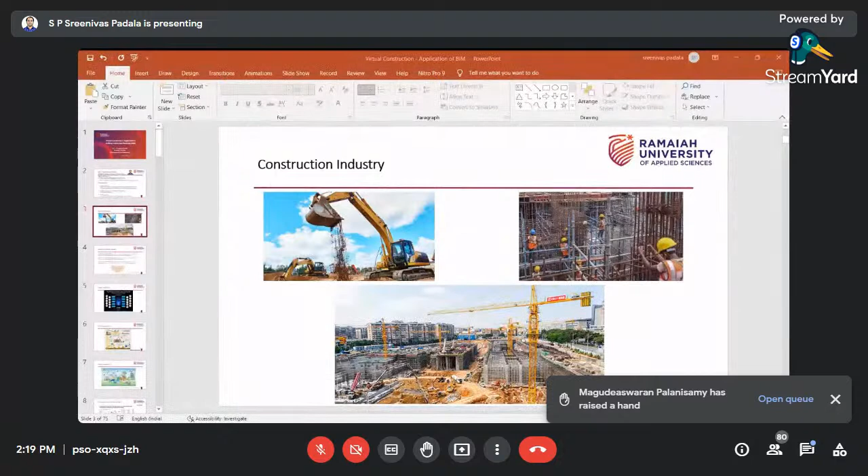Slides are not moving. Is it not moving now? Yes sir. From here it is moving. Can any other student check? Yes sir, it's not moving. Can you move it please? We'll check, just let me reshare, I think that will work, I'll share my entire screen.

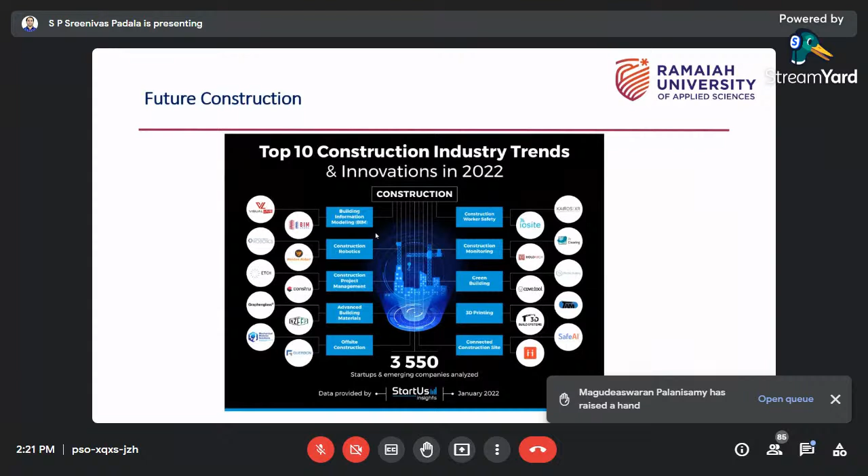I don't say this is only the future of civil, but apart from design, in construction planning part, what I'm trying to say is we have a lot of scope where you can sit in office and work. In layman language, it's more like office jobs basically, but with a lot of skills you can only get.

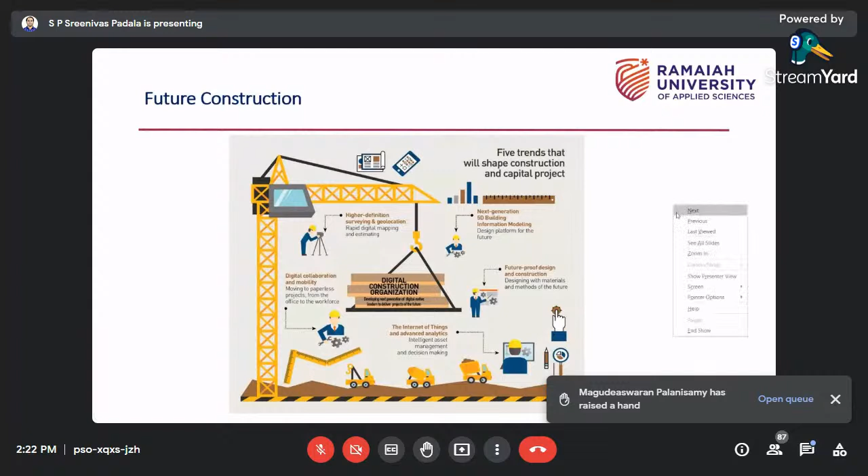They mentioned 5 trends that will shape construction and capital projects. So they have given 5 trends. You can see on the top left hand side, high definition surveying. Then we have next generation 5D building information modeling.

Then future proof design and construction. Then Internet of Things and advanced analytics. Then on the left hand side again, you can see digital collaboration and mobility. So these are some of the trends they have mentioned which will shape the industry.

Like it will change. So again, if you see in these, who is going to work? Not the labor or operators, equipment operators, or supervisors - they all will be working at the site. But these are the technologies which you will be using, right? So it's a different skill.

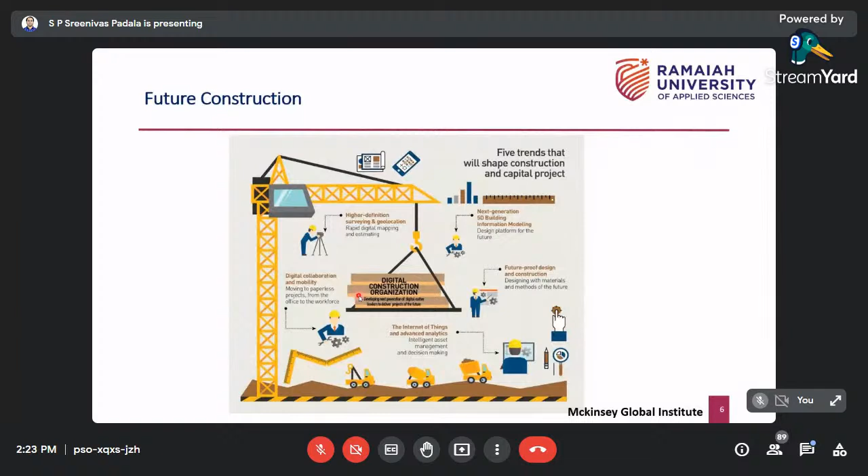So it all comes under digital construction organization. What it says is the future organization will become a digital organization. Like we know, everyone talks about digitalization now, starting with Paytm, right? For 3 years we're hearing about digital everywhere. The same thing is applicable even in our case. So the future will not be the normal construction industry, but a digital construction industry.

So this is another article by World Economic Forum, Boston Consulting Group. It is also one of the leading consultants, in abroad as well as in India. So they also gave the top 10 trends which will change the industry.

So again, starting here, prefabrication is there. Now you know Sobha developers, Sobha company, where my students are placed recently. So the entire Bangalore now, they are making prefabrication. Whatever projects they are executing in Bangalore, everything will become precast.

Then we have advanced building materials, which again repeats 3D printing. The previous session speaker already gave an introduction on advanced building materials and 3D printing. Then autonomous construction is more into robotics, augmented reality, and virtualization.

So I'm talking about this topic. Today's topic is point number 5: big data and predictive analytics, wireless monitoring, cloud real-time collaboration, 3D scanning, 3D printing - I will discuss these in the presentation - and 10, building information modeling.

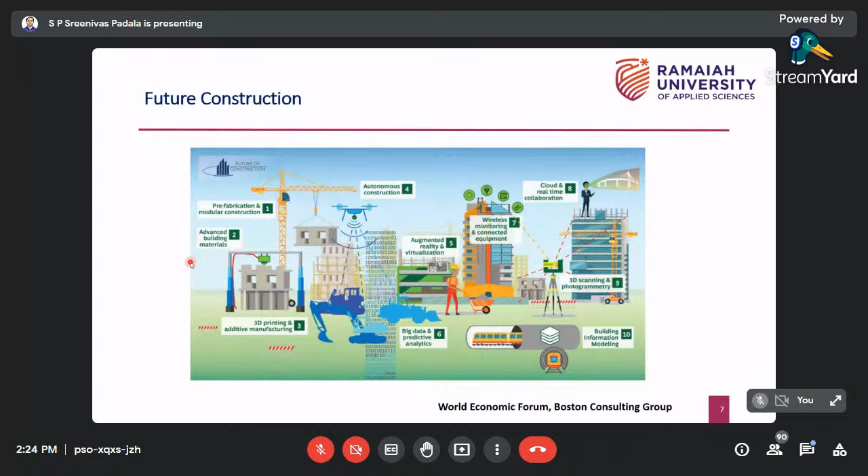So point 5, 9 and 10 I will be highlighting in this presentation. You can see how these trends will shape the industry, and you have a lot of scope. You have a lot of scope when you enter into our industry, maybe not immediately, but in the future. There are many articles that talk about technology.

Now I will start the actual topic. It's virtual construction. If you see here, the person is holding a mobile, and you can see there is a 3D plan on the mobile screen. What is the meaning of this? In layman's language, I think you can actually build the entire model on your mobile only - not now, but maybe 10 years later.

So virtual construction is all about building everything virtually first. You don't start the project immediately - it takes around 6 months. You start building up everything virtually, then you go to the project, call all the laborers, start procuring all the materials and equipment, and then start the project. But spend some time initially on building up everything virtually.

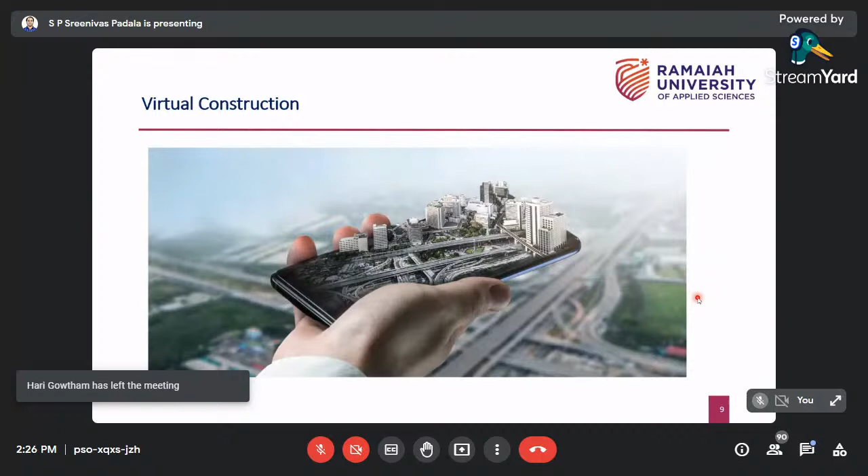Why? Because I will explain that later. So virtual construction is all about building up virtually - it's about the interconnection of various digital technologies, like site sensors. We'll be using a lot of sensors, self-operating equipment with no operator, and even deliveries of materials will be done automatically. Even concrete pouring is done without an operator - there's more automation in this.

Then, skilled labor - you can see on the left hand side how the labor is currently. For using this technology, the labor will be holding a tab in hand and doing a lot of analysis. You'll be more aware of the technologies, and ultimately the labor will become skilled. Skilled is not only about how quickly you can do the same work daily - that is not skilled. Skilled labor is about capturing and adopting the latest trends and technologies and applying them into the project.

Then you can see it's called robot. Robot is a small term here - not a human robot, but something where some activities can be done automatically, like bricklaying robots and painting robots. To do all these things, you need to build up virtually - you can simulate all these things. That's virtual construction.

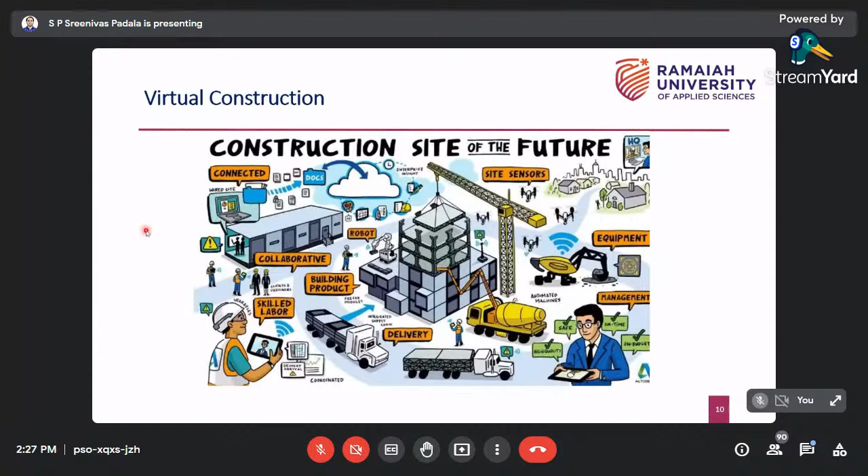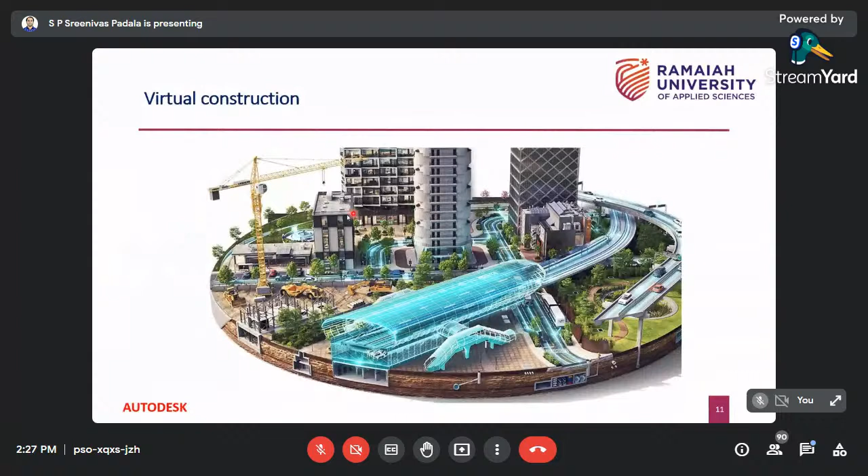Now you can see in this picture, another article by Autodesk. So what exactly you see here is an apartment - some commercial or mixed apartment, or maybe a residential project. You can see it's gray color - all existing in the project, existing on the land. Now I want to build a highway over this - I want to construct a flyover or a metro station, anything.

So what I will do is I will not start the project directly. I will not directly go to the site and start the project and face many problems, then stop the work. I will not do that, because if you see, it's a commercial area with a lot of people walking here and there, traveling and all.

So you cannot start the project just like that. You need to take permission. You need to see the challenges. You need to try to do the feasibility study, many things.

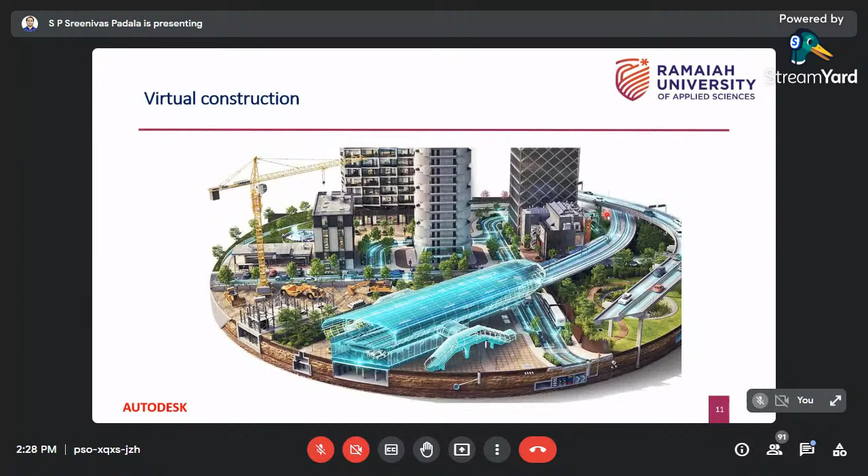So virtual construction helps us build digitally before you start the project. So what you're seeing here is all a virtual model. It's not a real model. You are placing a virtual model into the existing location digitally, and you're trying to do some feasibility study, trying to check whether it is feasible or not. So here, you can change the shape of the structure, you can change the alignment, you can do many things virtually.

Then you move to the site and give all the work to the contractor, and labor will take care of that automatically. We don't require that. So our job is mainly this: developing a model like this, doing simulations, estimating the time, estimating the cost, checking all the feasibilities, checking the alignments virtually. Again, everything should be done virtually.

So like I said, virtual construction is one of the major fields. When I say virtual construction, we have many things there. We have software systems like BIM, we have artificial intelligence, and we have autonomous construction equipment. These three basically together help us build everything virtually. But in this presentation, I'm talking only about BIM. I'm not talking about AI, and I'm not even talking about autonomous construction equipment in this presentation.

But overall, why is this happening? Why are all these changes required? Because we have a lot of manual work happening, and we have a lot of labor, but still labor is not available now. Earlier, 3-4 years back, if you talked about these technologies, people used to think about losing jobs. Now, if you see the trend after Corona, there is no labor available. No labor is interested in doing this work. They want to go and join industries, or even in malls, in shops, where they're getting at least 15 to 20,000. So why would they come and work in hot climate?

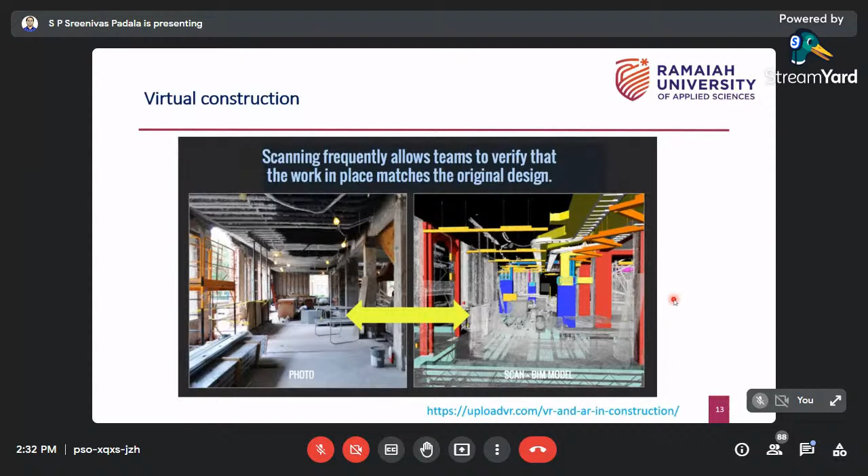So you build a 3D model in some software. Then you convert or transfer it into a tab like this. Then you come to the site and you can visualize. So you can imagine, by positioning this tab in front of you, you can see how this room will look like in the future.

So what you can see here is all these colors. The door is here, we have HVAC, some cable tray is here. On the right hand side, there is maybe a column or it can be a duct. And this white color is nothing but a duct, AC ducts, which are not there in this real model, right? It is not there.

So what you're trying to do is, you're not starting a project now, you're just planning it. You come to the site and you impose this picture onto the real model, and you're trying to see whether it is feasible. If it is feasible, okay, I will start the project. Otherwise I will not start, I will go back and I will rechange, I will modify. So I can do this several times without putting labor on the site, without wasting any money.

It will not cost much also for us. Initially it may cost much, I mean you have to invest much money to buy these softwares etc. But later, once you spend that, once you implement that, it will become very cheap in the later stages.

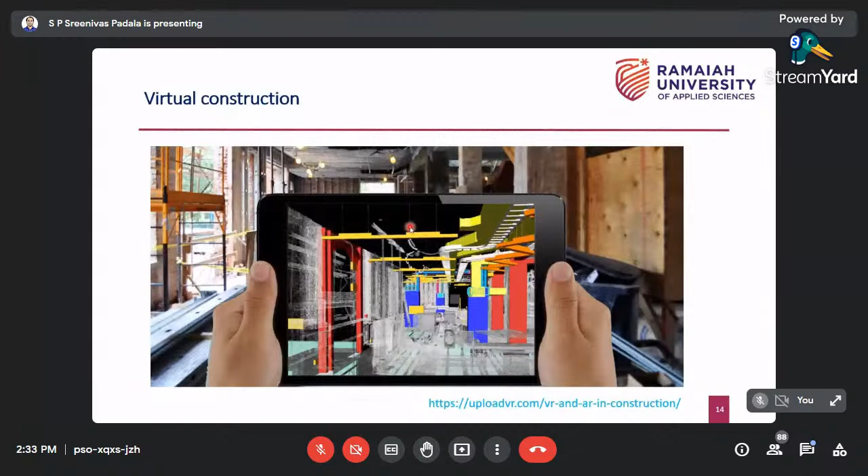That's what. Here also you can see that a person is checking the model, and there is no model actually in front of him. It's a steel structure which will come in the future.

So it's a company called Unity Reflect. They actually work on a set of solutions. It's available everywhere, in India also. The company is there in India also.

So what is happening? He built a 3D model virtually in his software called Autodesk Revit or many other softwares. Then he is coming to the site and checking how it will look like, if it is feasible or not. So I'll just play another video.

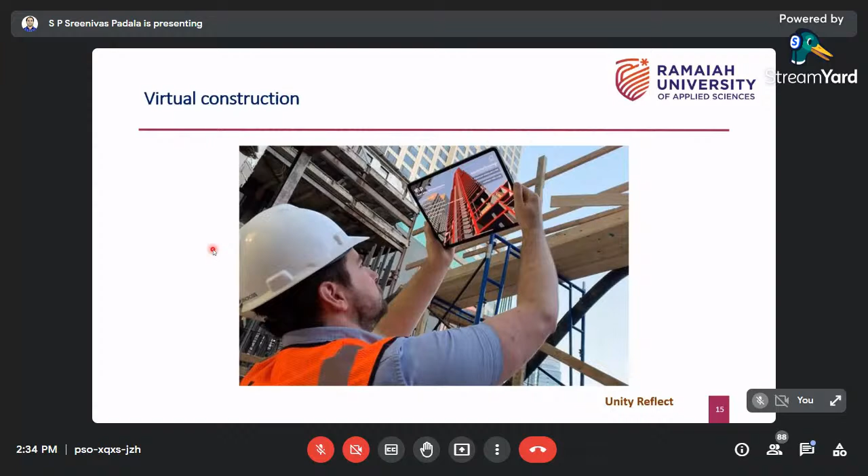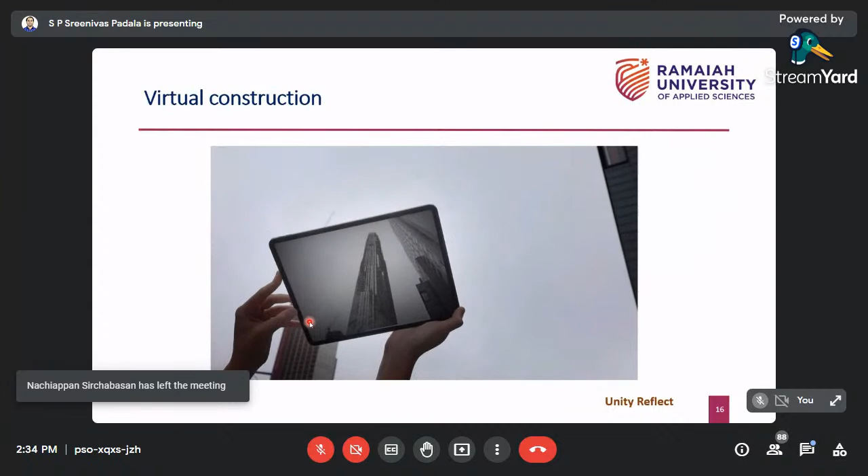So you can see this video now. In this video, you can see that on the person who is holding a tab, behind him there is no structure there. So what he is doing is he just wants to check how it will look like. So it's almost looking like real, right? The video, it's looking like real. There is no structure actually in front, but it shows the future, like how it will look in the future.

Basically, it's already happening, construction is happening, you can see here, but it's a finishing structure. So it's a very normal thing. It's mainly from an architectural point of view, they want to check the aesthetics on it, but it is not just about that. Many things can be done, which I will show in the next slides.

So it's another virtual model again. It is shared by James Bowles, one of my dearest friends. He's basically a 4D BIM consultant in UK. So he shared his video.

So what you're seeing here is, again, I think in your 4th year you should have a course called Construction Management and Entrepreneurship. There we'll be teaching CPM and PERT, critical path method. There is one technique called PERT where it helps us to schedule the project.

So when you talk about any project, we have so many activities, starting with excavation, then foundation construction, footing construction, then basement walls, retaining wall construction, then ground floor slab construction, then column construction, then slab construction, then door installation, lift installation. Like that we will have more than 200 to 300 activities basically.

So that is on the left hand side, what you see is this is what we're teaching currently. On the left hand side there is a bar, it's called a bar chart, or it is also called a schedule. On the right hand side you see the virtual model. So what is happening, you can also simulate that, you can simulate the entire project work. So I will show how it is done basically.

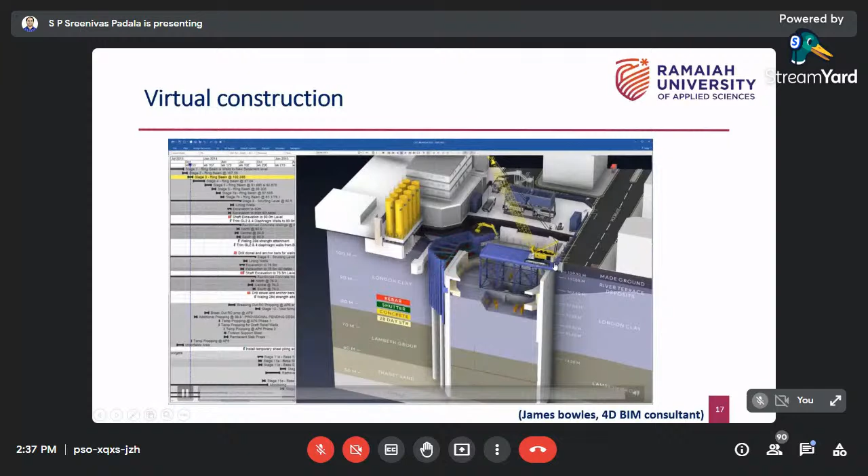As you can see, this is basically a simulation, showing how it is building up. So what you're seeing is the entire project construction, the execution of the project for the lift shaft. They're coming step by step down, it's a top-down construction, basically underground.

They're trying to build a shaft using a tower crane, a mobile crane, and an excavator. They are building up slab by slab, step by step. You can see how detailed it is. This is called 4D modeling.

It comes under BIM, so I've written 4D BIM at the bottom. It's one of the dimensions, I'll explain that later. What you're seeing in this video is, on the left hand side, the activity that is there, and for that activity it is showing the virtual construction, the visualization done for that.

So what is happening by doing this? What is the benefit? You can actually see how it goes. If any problem is there, sometimes you can check the time, how much time it is taking. You can return here, it shows 28 days, so it is taking 28 days. Then you have to check back whether it is feasible or not. If you don't want 28 days, you can minimize it to 20 days, or increase the time. You can do all these scenarios before you actually start the project.

So I'll just play again, just in case anyone missed out, it's only a few seconds. You can see that what I'm trying to show is this is all about virtual construction. See the level of detail we can do.

So we have software for this. There are softwares which are free for students, for faculty, for education, and there are softwares which are commercially available. The software which I'm showing is Synchro, by Bentley.

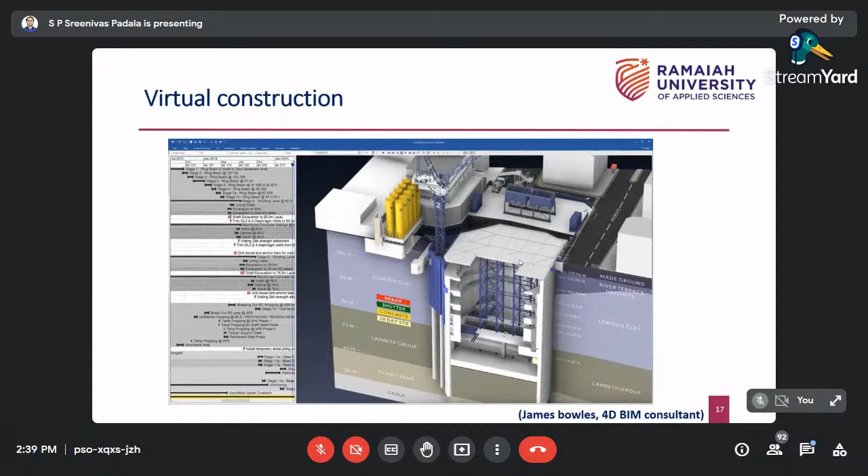So again, there are different terminologies in the world. People call virtual construction as digital twins. Digital twins means we have one real model, one original, and one virtual model - that's a digital twin. Then some people call it augmented reality.

Whatever videos or snapshots, like the one I showed where he went to the actual location with a tab and is checking the video, checking the model - that is called augmented reality. Some people also call it virtual reality. Again, currently they also call it BIM, which is a term used for virtual construction or virtual design. Recently I also came across zero drawings construction.

It's a very interesting term which I will show you later. Zero drawings construction means we don't use any 2D drawings, no AutoCAD drawings, no physical paper in hand - everything is 3D models. You hold a tab with you, go to the site, zoom the 3D models, change the location, visualize any angle, and communicate with the labor to start the working.

So there is a project in Norway where they are currently executing one overhead highway project without any drawings. It is called zero drawings construction. So there are different terminologies.

In India, most people are now also calling it digital construction. Then we have construction industry 4.0 - we already have industry 4.0, which is all about automation, and then connectivity using Wi-Fi technologies, all the IoTs. So these are the various terms. There are still many other terms, but I've used the ones which are most frequently used. But they all come under one platform: virtual construction, building up everything virtually before you start the project. That's all about that.

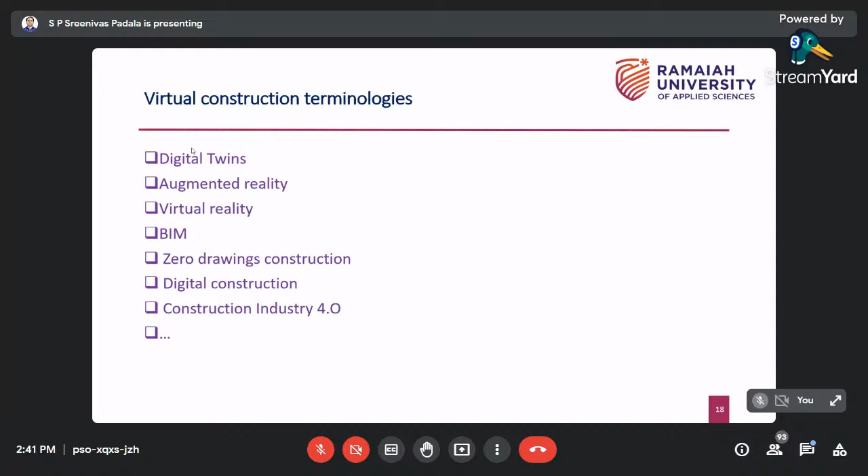So if I define what is VC in short form, it's virtual construction, or it is also called VDC, virtual design and construction. According to the BCA, Building Construction Authority Singapore, VC is management of BIM models as well as people and processes in order to achieve explicit project or organizational goals and to improve performance. So in essence, VDC is to build twice, first virtual, then real. That's what I'm trying to say from the beginning.

You see on the left-hand side, it's a virtual model. First you build the virtual model, you do all the simulations, not only design. What you're seeing here may look like architectural design, but it's not only that. You can do architectural design, then structural analysis, then time estimation, cost estimation, life cycle cost estimation. You can change materials and calculate carbon dioxide emissions. You can virtually do many types of analysis.

Then you start building the real one. So VDC, in short, is built twice. First virtual, then real. Build twice enables a project team to fully simulate design and construction in a virtual environment, prior to actual execution on the site.

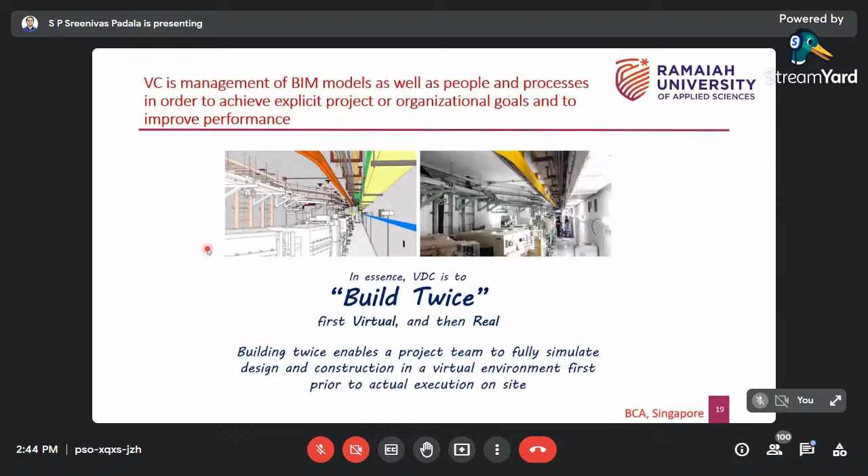So prior to the actual project starting, you build everything virtually, simulate, and check the data, how it works. You will find a lot of issues, not one or two, but too many issues, which can be minimized virtually without spending a lot of money. Once all the problems are resolved, then you can go to the site and actually start the project. You may get some other issues like rains or COVID, but those external causes cannot be managed with virtual construction, though internal issues can be.

So this is all about basically VC. And I was telling that I'm talking about awareness in India again.

So you see these articles, some news articles are there, just a sample I kept. All these articles are Indian, written by Indian companies, for India basically, not for other countries. The articles came from The Hindu, Times of India, India Today, and some technical articles like Geospatial World. They are all from Indian sources.

See that terminology, digital twins in demand. That means there is a skill requirement. What we're trying to say is students have to be aware of this type of technology and try to acquire it during their education.

Then power of augmented reality in construction. Then improved design and construction of the New Delhi International Convention Center through BIM. I think recently you know this center - the entire project was executed using BIM. It's basically Tata Projects and Shapoorji Pallonji who have executed the entire project using BIM.

So who actually did this entire work in Tata Projects company, and Shapoorji Pallonji Limited company? The engineers working in the company have done all those things themselves. These companies never hired any foreign consultants - it's all done by our Indian engineers only, who were capable, who learned and acquired these BIM skills.

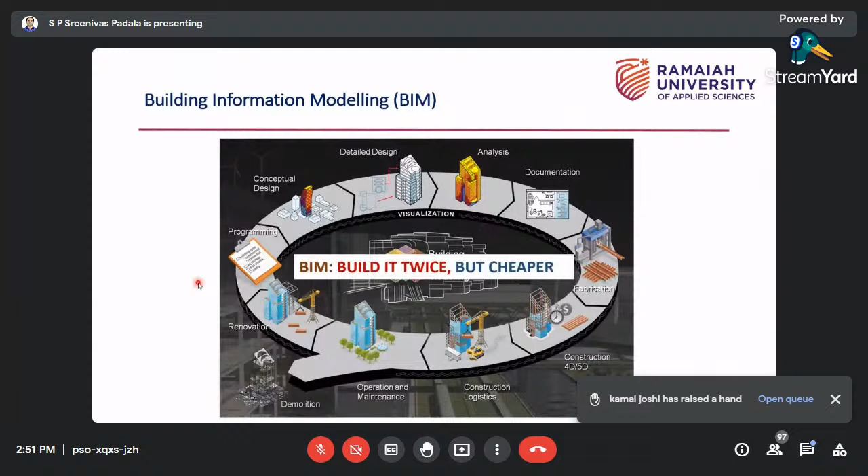So that's what they say - previously I told you virtual construction is all about building twice. Now BIM says that you build it twice, but cheaper. That's the output you get from BIM, building information modeling, or from virtual construction.

A question will arise: why build twice? Why spend this much money on all these things? Why develop software, why buy software, why buy systems? Why waste a lot of money on all this? The ultimate benefit of this technology called BIM or virtual construction is that finally we can build cheaper - we try to save money by doing this. We analyze which areas we can minimize cost in, which we cannot do in a real project - when we start the project directly, we don't get time to do all this. So BIM is all about that: you build it twice, but build it cheaper. Finally you can minimize time, reduce the project time, and reduce the cost of the project. That's the ultimate goal of virtual construction.

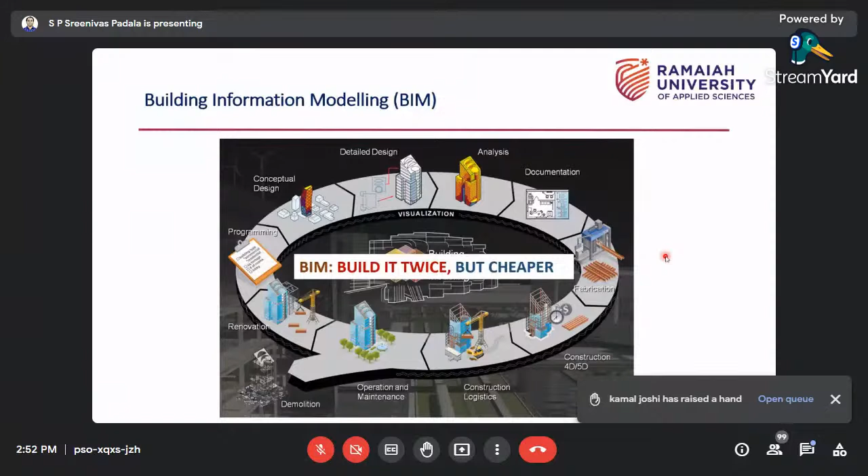Then only will people invest, right? If you just say you want to start this technology, who will listen? No one will listen unless you show the benefits.

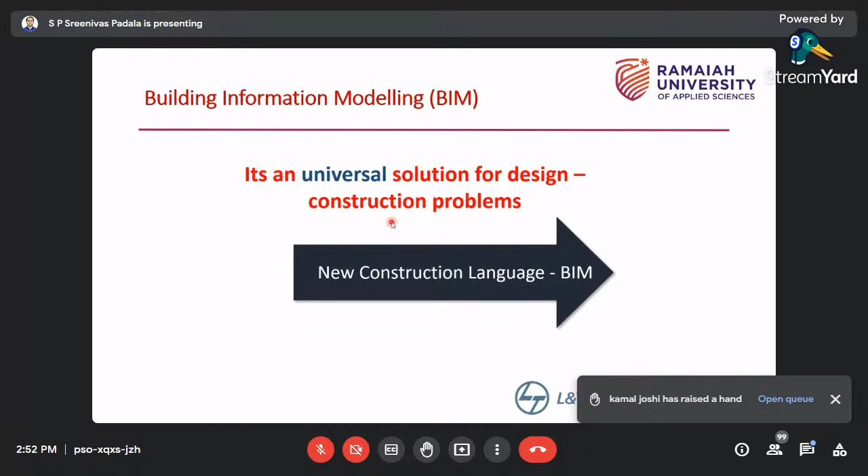So L&T construction says that BIM is a new construction language. There's a lot of demand for it in L&T also - we have people in HQ, and if you go to the head office in Tamil Nadu, there's a separate department currently working in this area. They call it a new construction language, BIM, because it is a universal solution for all design and construction problems - it can resolve all these issues. That's the reason.

So many things happen - like doors, once fixed, sometimes have to be refixed. They don't properly fix the elements. Sometimes you make a lot of mistakes in the design itself - the design can get wrong. Sometimes the project layout or site layout gets messed up, with so many equipment and all. So you end up doing a lot of rework in the project.

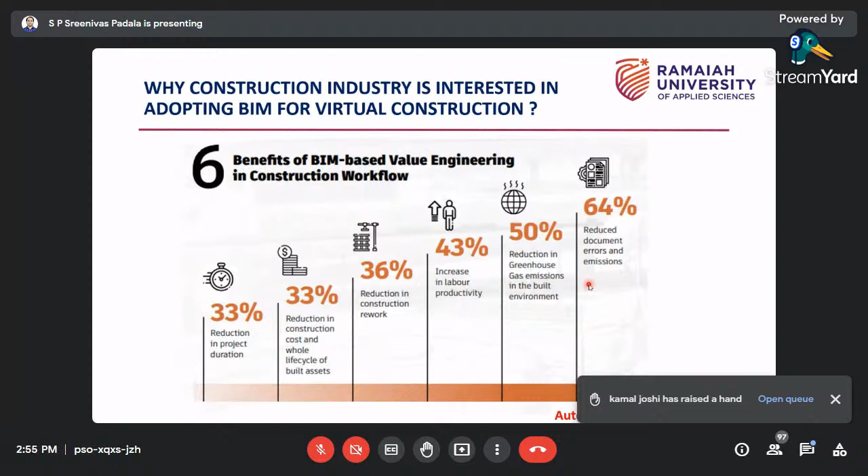So in BIM, what happens? We have several dimensions, like capital D. First is 3D, it is called visualization. It represents the building in 3D basically. Everyone knows 3D, even in AutoCAD we can have isometric views and all, right?

3D model can be done in AutoCAD, but that is different. In AutoCAD we develop line diagrams, line models, not true models. It's line diagrams basically. Whereas in Autodesk Revit, if you go into the Revit software, you can develop a true 3D model. BIM starts with 3D basically.

Then you have 4D, the fourth dimension, which is nothing but time. Then we have 5D, which is nothing but cost, the cost of the project. I think you might have already learned 5D in your estimation and costing course, where we teach how to take out quantities, do the rate analysis, then multiply quantity into rate, you get cost. That is 5D.

Then 6D is operation, all about facility management. After completing a project, you need to maintain the building, right? You will have a lot of things to maintain, check, and repair. You need to do servicing, and for commercial projects a lot of service in AC, air conditioning. You will have a lot of false ceiling, and under that false ceiling you will have plumbing, electrical, everything. All the lines go in the ceiling under the slab, so you have to do a lot of maintenance. That is nothing but 6D.

Then 7D is sustainability. We know the carbon dioxide emissions, right, and reusing waste materials in a project and all. So there also BIM can help. Then 8D is a quite new area. It comes under safety, immediate emergency plans, preventing security issues, more into building safety basically, which we're not working on. So these are the dimensions we currently have.

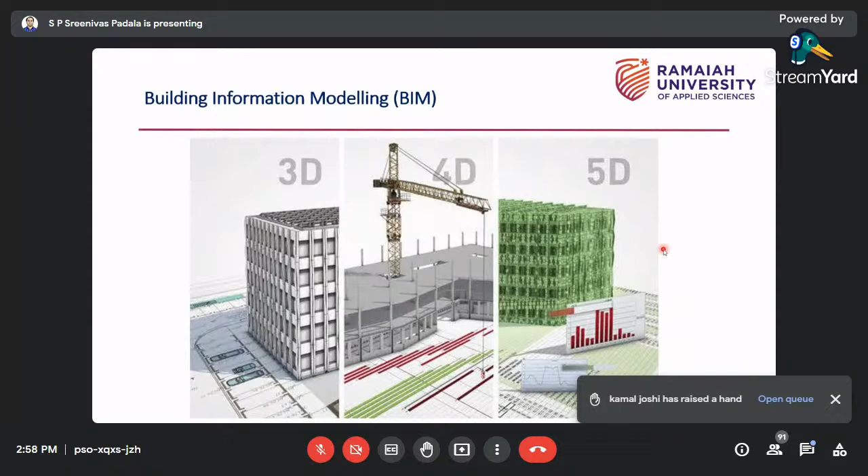So what is happening is all these dimensions are working on the 3D model again. The 3D model is a central platform for all the dimensions. Without a 3D model, you cannot do anything, you should have the 3D model first. From the 3D information model only, you can do time analysis, scheduling, costing, simulation, energy analysis, safety analysis, quality checks, everything can be done.

So you can visualize this model before you even start the project, and you can change it. Another advantage is you can change the location of a pipe to another location. You see what happens. You remove this column, put another column here, put one pipe here. You can do many changes virtually without going to the actual project, which cannot be done otherwise, and which will cost you huge amounts.

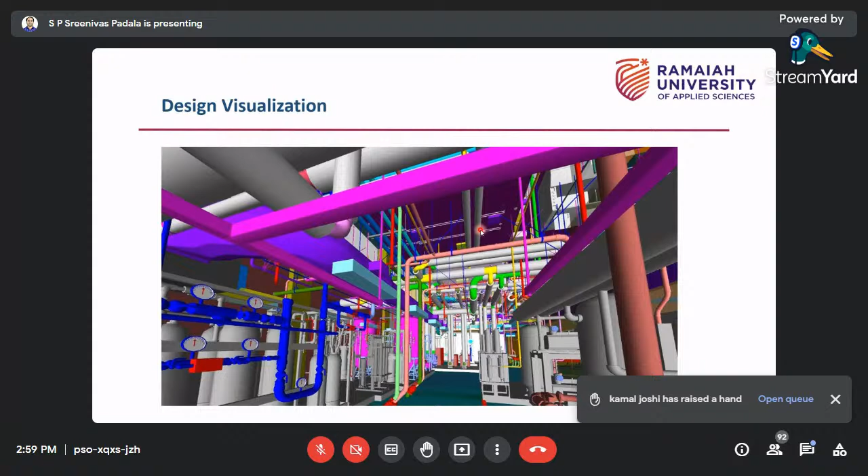Another main benefit of BIM is you can identify errors like clashes. You can see there are 2 elements crossing each other, which is not possible. Eventually you can identify these errors and go to the site to change it. But if you don't use this technology, you'll find this issue on site in the middle of the project.

Then you have to stop the work, tell them to redesign the building, and ask the designer to submit new drawings. At least 15 days will go into that. Whereas in this BIM platform, you can actually identify these errors. That's the main thing. Virtual construction is all about identifying all possible errors before you start the project so that you can resolve them, then start the project without any error.

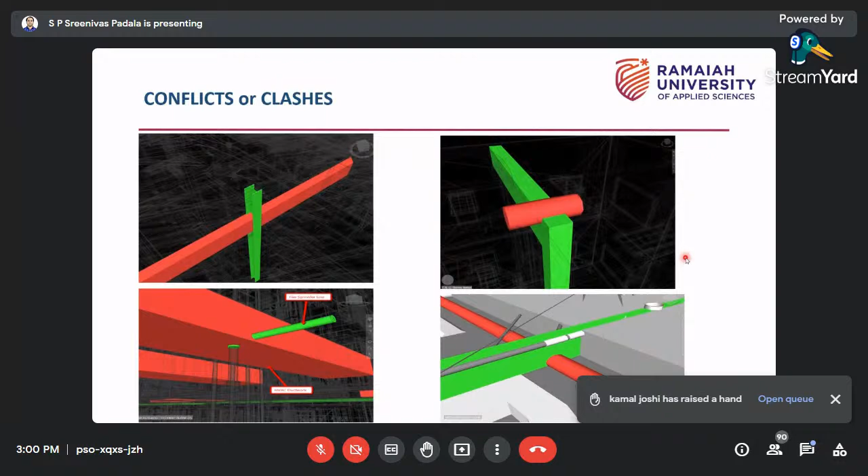That's all. So you can see these vacancies, conflicts, and clashes happening. You can see the drawings - there are two drawings on top. On the left-hand side, you're seeing 2-3 elements which are clashing with each other.

Now what you do is change it, and come to this level. Now you can see this figure - you will not find any element touching or clashing with each other. So you can do this virtually, right? It will not cost you anything. There is no labor involved, no crane required, nothing required. It's all done virtually here.

But if you identify this mistake during the actual project, what happens? You have to stop the project, all the equipment will get idle, and you will lose a lot of money. So these things can be minimized. All the clashes between the models, all the clashes between components in the building, can be resolved before you start the project. Similarly, you can see on the bottom also.

You have some elements like plumbing pipeline and electrical pipelines, and you can see multiple clashes happening. On the right-hand side, you'll find it can be resolved. Then you start the project, inform all the engineers, and then you can start the work.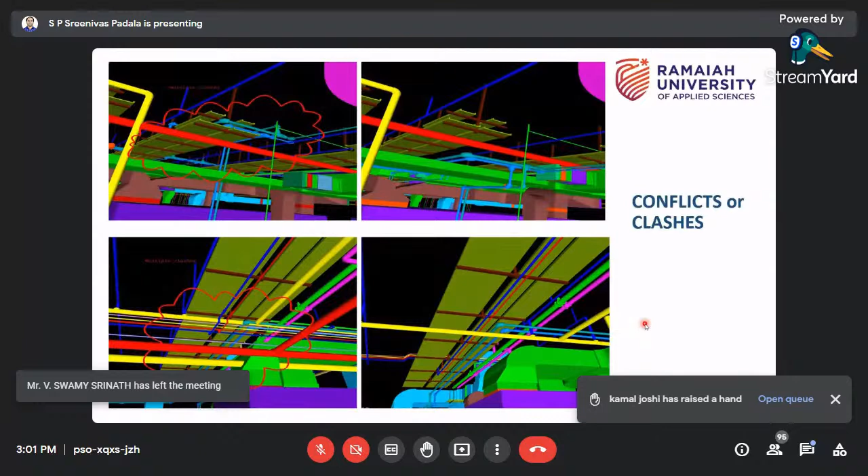Some more pictures - you can see the left hand side again, it's very complex. Basically, all this happens in commercial buildings like hospitals, metro projects, and shopping malls. There, in the ceiling level or in the basement, you will find a lot of issues. So all this can be resolved using technology like BIM.

You can see at the bottom also how it looks. Very clearly, the left hand side picture and the right hand side show the difference. It's very clear now - there is no clash. The elements are passing very near to each other, but they are not hitting each other. These types of mistakes can happen in a project, which can delay it and affect it drastically.

So when you talk about softwares, generally it's all done in software. When I say virtual construction, BIM and all, even Excel is also a virtual construction software. Interestingly, there are several softwares that all come under Autodesk. You will find cost management softwares, design checking softwares, bid management, tendering softwares, scheduling software, estimation.

Then layout softwares for preparing site layouts, document management, mixed reality, plan grid. There are several softwares are there.

I'm not trying to make you learn all these things. You don't have to learn everything. You have to choose one area and learn in that, then develop a skill in that. You cannot apply for a job saying that you know everything. You have to choose some specific area and focus on that area.

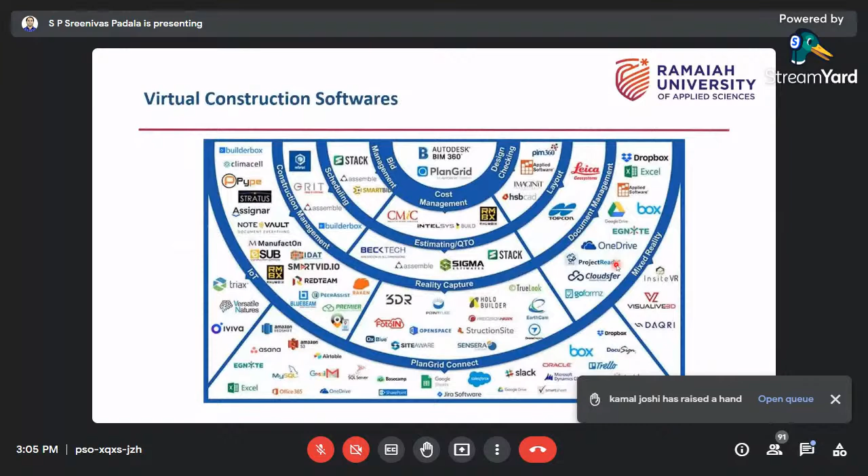So you can learn all these things. At least 50% you can learn on your own only. That's what industry wants. Industry doesn't want you to learn everything and become an expert before you apply for a job. They will train you later, but you should have some basic idea, not of the software, but of this entire concept. So I'll just show you some examples. I'm not going into too much technicality in this presentation because you cannot follow it in just 1.5 hours. It's very difficult. I just want to put more pictures and make it interesting for you.

So this is what I was telling, right? There is a concept called zero drawing construction. In this project in Norway, there is the Randselva Bridge project. It's one of the world's longest bridges at 634 meters. Entirely, this project is made on BIM models. There is no drawing - they did not use 2D drawings. Entirely, they built a 3D model and used it to execute the project. It's an ongoing project actually.

So you can visualize many things. You can also visualize the reinforcement details inside the model. You can see the spacing - if you zoom into the model, you can check the spacing between the reinforcement. If there's any issue, you can change the spacing of the reinforcement. So you can come to the site and put this entire pier, and check how it looks.

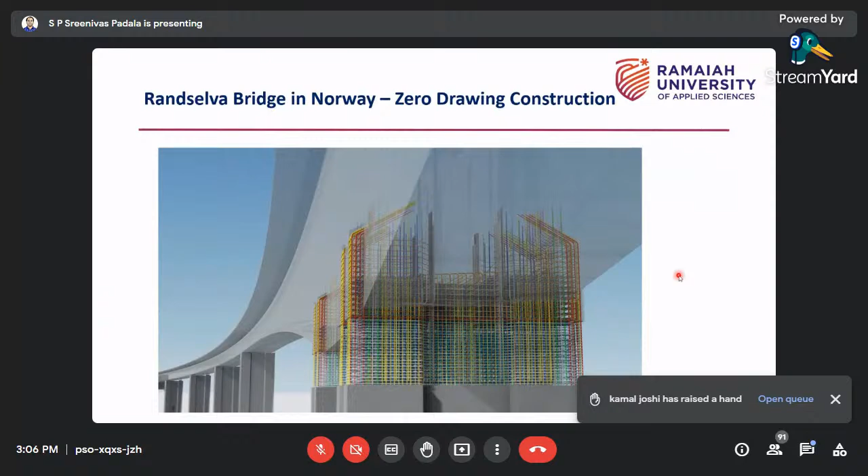So entirely this project is actually ongoing and completely done on BIM models. So this is how it looks - this is a 6 months old picture. Currently also you will not see much change, but this is currently the status of the project.

Now what is happening? You can see that the project is in the beginning stage. You can see only piers, pier caps, pile foundations, everything is there, but they are not yet started completely. They are still in the substructure or just part of the superstructure. So they are in the beginning of the project, but still they have done everything.

All the project is complete already. They did even simulation of traffic also. So you can also do traffic simulations, where you run vehicles with actual load, you can scale it down and see the traffic load on the bridge. You can also verify the vibrations, whether the building will be safe or not, monitor the structure, and do structural health monitoring.

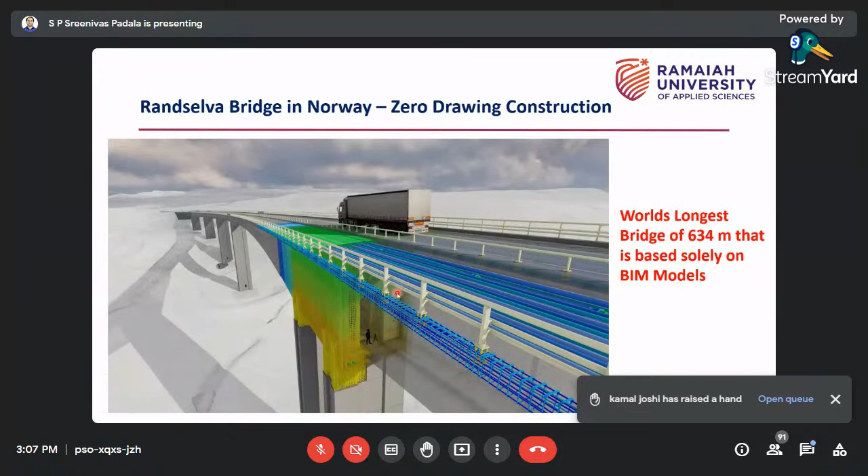This is the actual status. Again, India, if you talk about India, it's already there in the companies. It's already implemented. 3D, 4D, 5D is already taking place in the company in more detail.

So these are some of the projects. There are so many projects, not just one or two. You will find Personal Rapid Transit System in Amritsar, entirely executed in BIM, Bangalore International Airport, Nagpur Metro Rail Corporation, Delhi Metro Rail Project, Agra Kanpur Metro Rail Project, renovation of Central India's Gwalior Railway Station, and commercial projects like hospitals, shopping malls, IT complexes, all built using BIM. These are real projects already executed in India.

So just think about those people who are actually working in these job roles. They are basically nothing but BIM engineers.

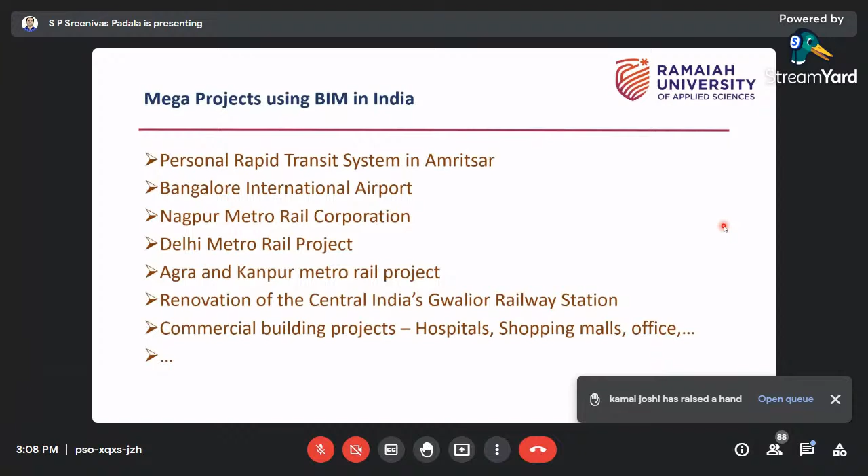Some of these are 3D visualizations, projects executed using BIM models. So when you see these pictures, it's not an architectural thing, it's not about aesthetics. It's not just about building a 3D model and leaving it. Actual BIM or virtual construction starts from the 4D, time and cost.

You see Nagpur metro station. This is how they made the model. First they presented this model to the client. Once the model is approved, they started simulating the time and cost. See the level of detail in this, including the foundation, you can see on the right hand side how the details are there.

One more important thing: this model is done by more than 20 to 30 engineers. Everyone gets some task. Like, the architect develops the architectural 3D model. Then the structural engineer develops the structural 3D model. Construction engineers develop their construction models. Mechanical, electrical, plumbing, everyone develops their own models. You will have more than 7 to 8 models.

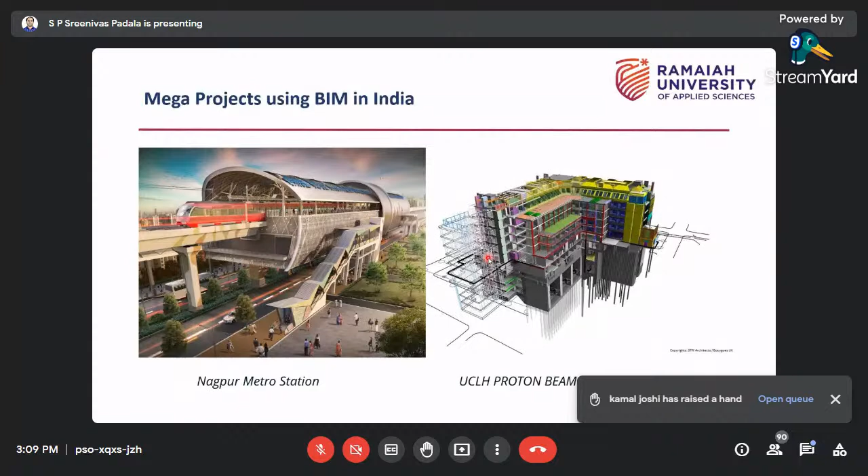Then those models are put together and integrated using Navisworks software, which also comes under the Autodesk platform. It's also free to download for students. I will show these particular softwares. So this is all about the introduction on virtual construction.

In the short time, I cannot really explain much technical detail. So now I will show some details of virtual construction projects executed in our university, at MTech and BTech level, where students are working on these BIM projects.

This is one of the BTech projects where a student applied 3D, 4D, 5D, all three dimensions, for a residential apartment, using Revit software. His name is Krishna Gowda, currently working at Atkins. He got the job not through campus placement, but applied to Atkins directly, and got a job as BIM trainee.

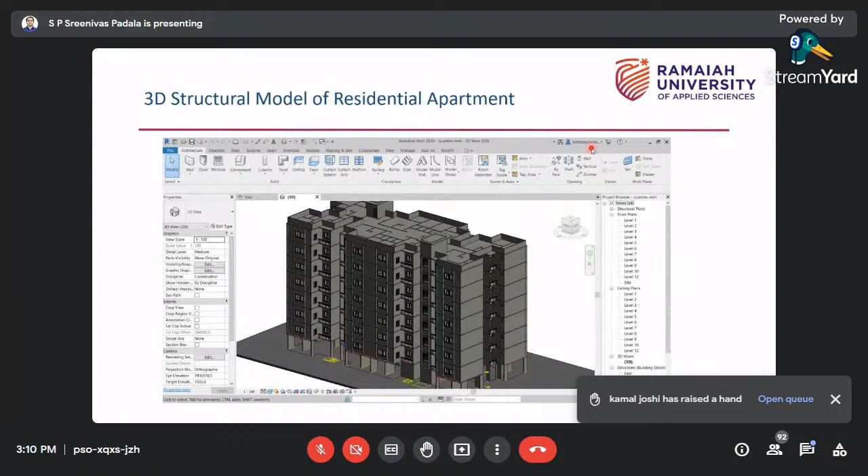I think within 2 months his probation will be over and he will become a BIM engineer. But currently he's working at Atkins in Bangalore. So that was one project.

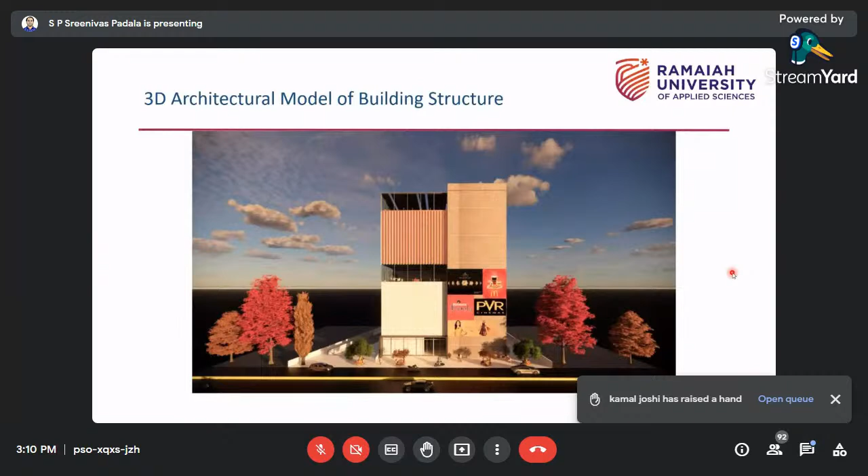Another project was also executed by BTech students as an 8th semester project. They did a 3D model of a shopping mall, proposing a new shopping complex. There are so many things I'm not showing—it's not only the architectural plan, but inside MEP, electrical, plumbing, time, cost, everything they executed.

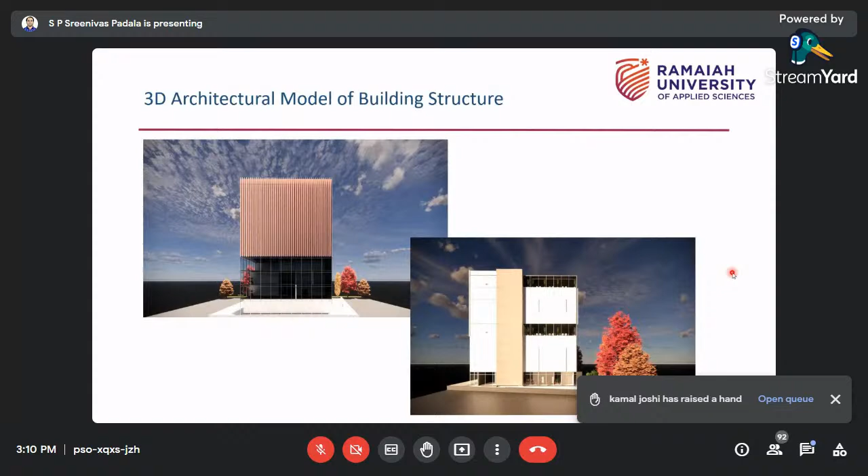So this is just for demonstration. They also showed some creativity here. You can see the level of detail required for this. This entire model is done in a very detailed manner, and it takes a lot of time also.

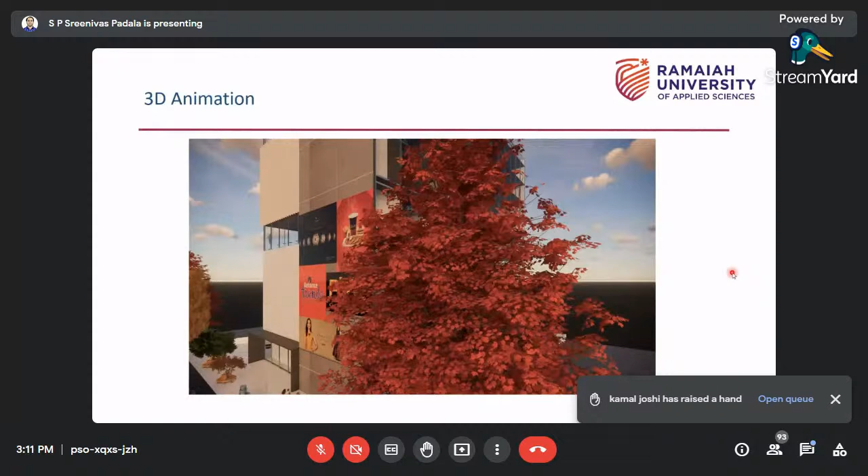It's another project done by an MTech Construction Management second year student, Kaushik. He actually did a 4D/5D model for a hospital project in Andhra Pradesh which is already completed.

He went to that project, used all the 2D drawings, then built a 3D model, and compared the benefits of the built model. You can see at the bottom there is a model shown.

Then there is a project schedule, called a Gantt chart, bar chart, or CPM network. It's basically a timeline, with times given for each activity, a starting time, an end time, and simulation is done.

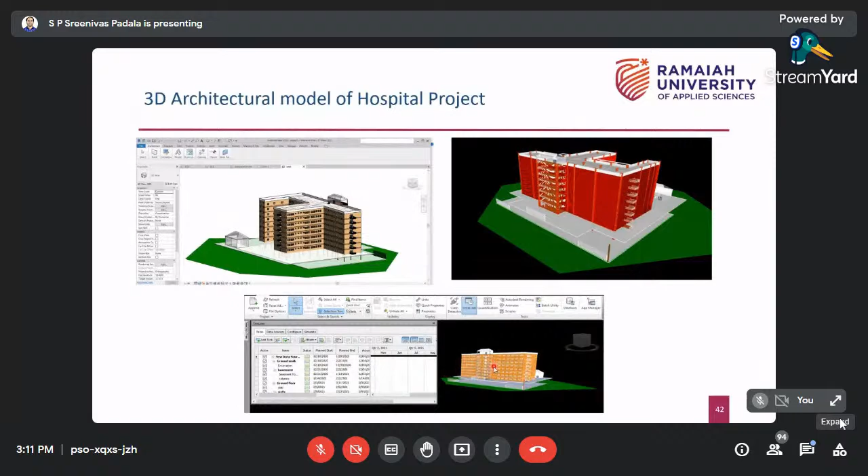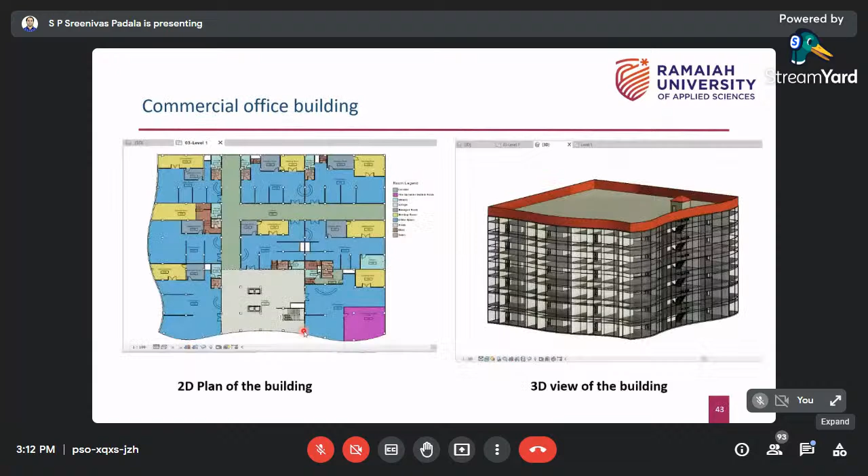Basically, it's not easy, but once you develop this model, you can reuse it again for many projects. That's the best part of this. You just have to change the dimensions, but you can use the model many times.

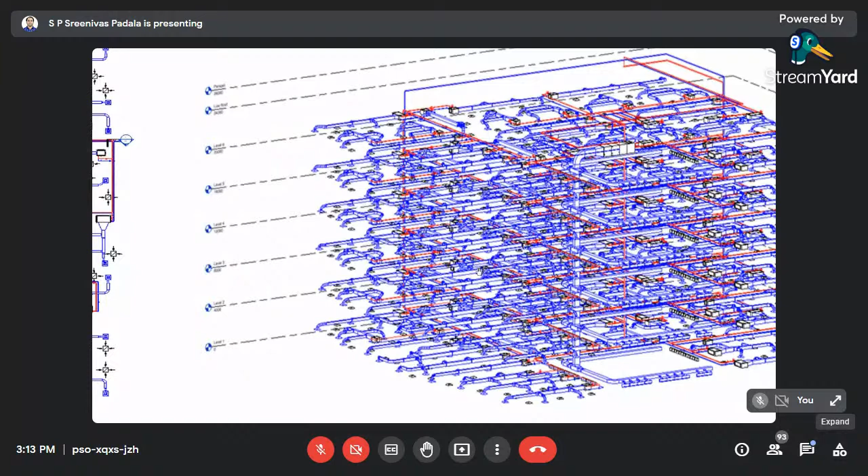So once the 3D model is built, he developed a 2D plan automatically. That's the thing used. This is not taught much - we have a building services course in MTech Construction Management, but I did not cover much into this. We have an introduction course, but he learned it himself and came with this project.

So what is happening is each model is done separately, then all the models are put together, then clashes are identified and resolved.

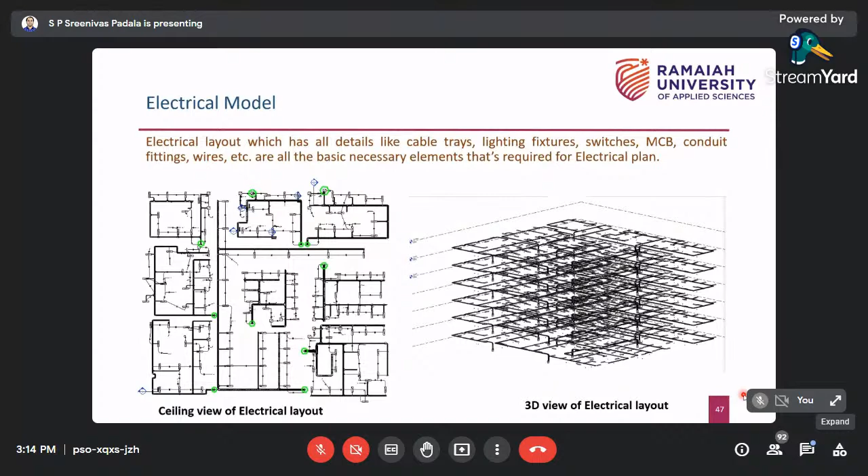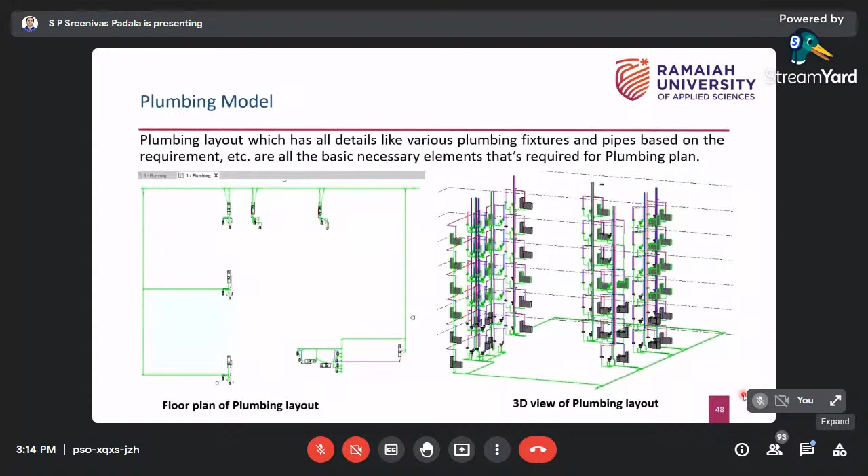You see on the left hand side the level of detail. There is some mechanical, electrical, plumbing elements there. You see this one, this pipe - it is hitting the wall. Now this detail is 3D.

This 3D model is different, and this structural model is different. If you remember, I have shown the models separately - the structural model I showed separately. Now you can see in the integrated model, we have all the MEP details - electrical, mechanical, plumbing details also embedded. So here, 4 or 5 models are put together now.

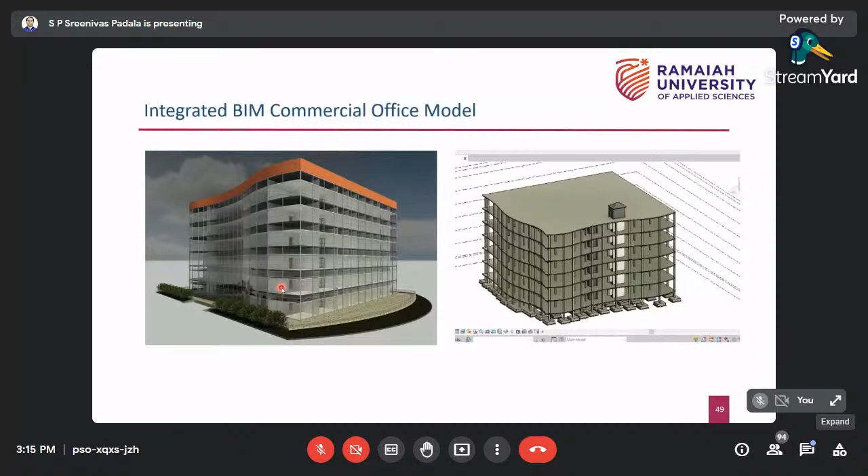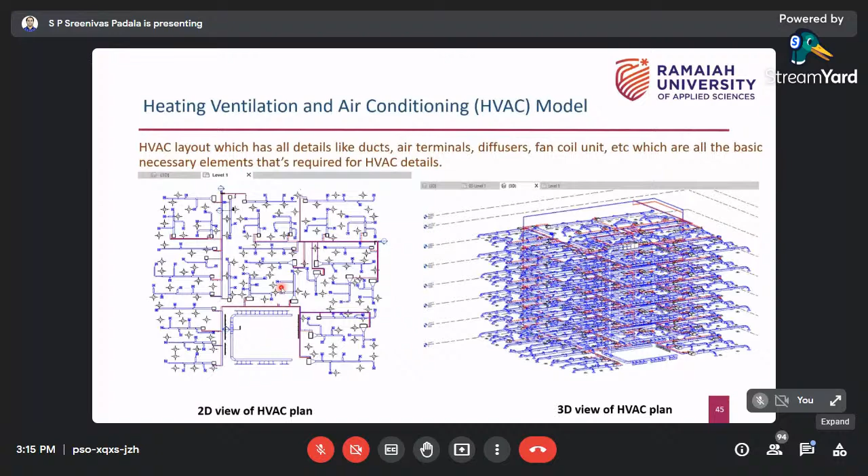Previously, what is happening is all are independent. You see how the structural model looks - it's only structural details, we don't have any plumbing line, electric line passing in this model. We don't have any details. Once I develop all the models independently, then I integrate it together.

So what is happening is there is a pipeline hitting the wall. Once you integrate the model, then you realize this. On the right hand side, there is nothing there like that, we don't have any integration. So what is happening in this model is the wall is removed completely. We removed the wall here because we cannot change the location. So there are several changes that can be made in this model. You can change everything before you start the project. But in the actual project, if you do these changes, it will be a costly rework.

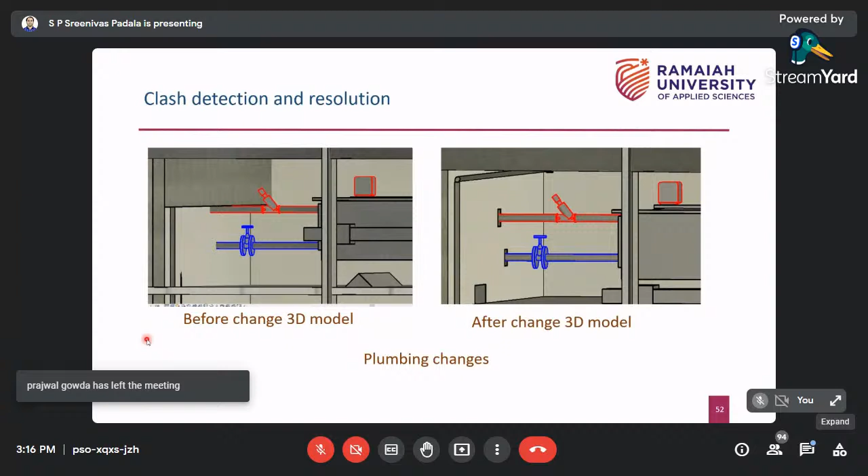More pictures. You see here also, there is a pipeline again hitting the structural wall. So what they've done is removed this wall basically. Again, when I say remove, it's not simply removing - you have to check the structural design aspect also. But all these changes can be done virtually here without going to the project site. Now just imagine if you want to remove this wall in the real site, in the actual project, if you find this mistake, then you have to demolish the wall, break the wall, put in labor, clean it, and reconstruct. A lot of money would be lost. So you can manage this virtually without spending any money.

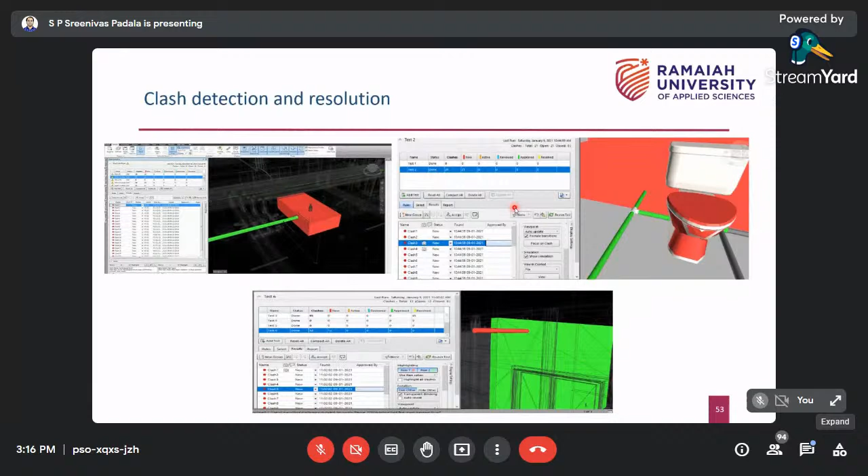So this is what happens when you identify mistakes like this - clashes. One pipeline is hitting the wall. On the left hand side, it will show the details. Interestingly, it will show many things - the details of clashes between architectural and structural, architectural and electrical, structural and electrical, plumbing and electrical. It will also tell you from which area, which domain it is. So all this analysis will be done. Like I said, in modeling all this, it's not only just modeling - you will do a lot of analysis behind this.

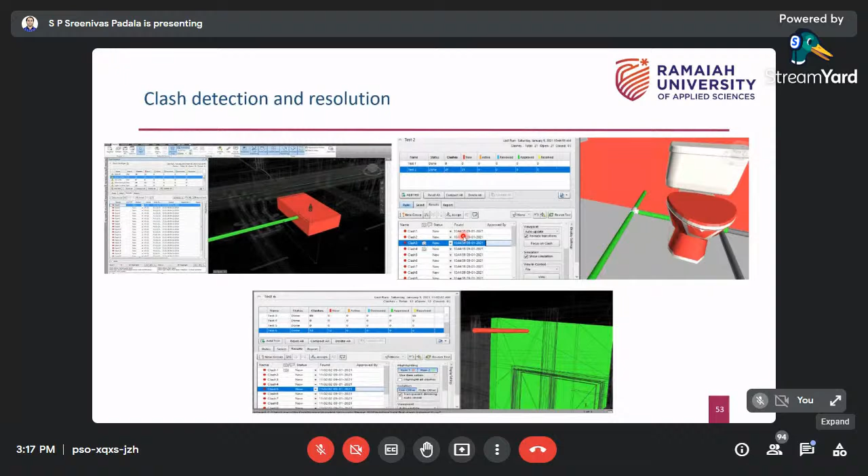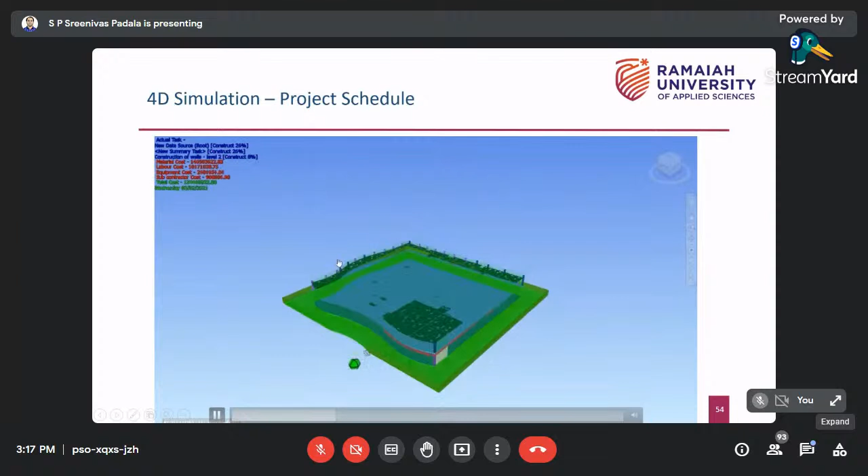More than that is okay, but it's not important. The simulation or animation may look good, but the best part is on the left hand side - at each stage it shows the material cost, labor cost, and equipment cost. If I pause it anytime - let's say I pause now, stopping the simulation - at this stage, maybe second floor, I can see how much money I had to spend, how much labor money, how much equipment cost I need to spend in the future. It tells stage-wise how much time and cost I need to spend, and shows percentages of how much work is already over. Right now it shows 43% of work is already done.

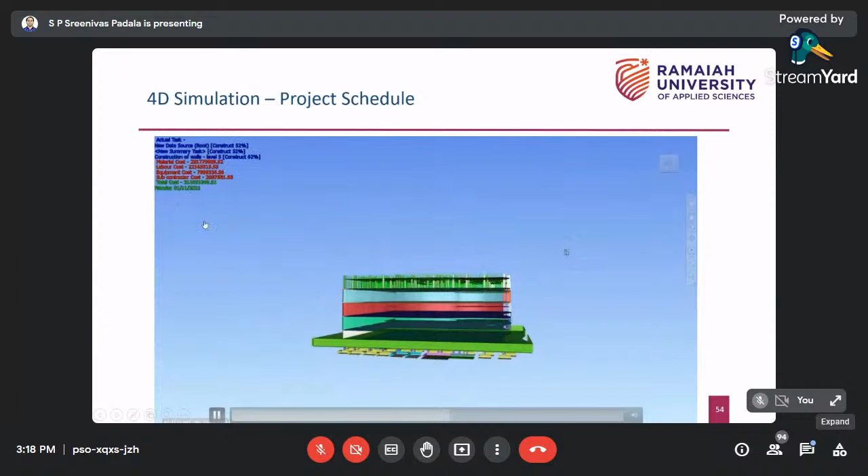So you can see many things can be done, you have to do a lot of work behind this. Again, it's the output basically - you have to do scheduling analysis and cost analysis, and that has to be loaded into this model.

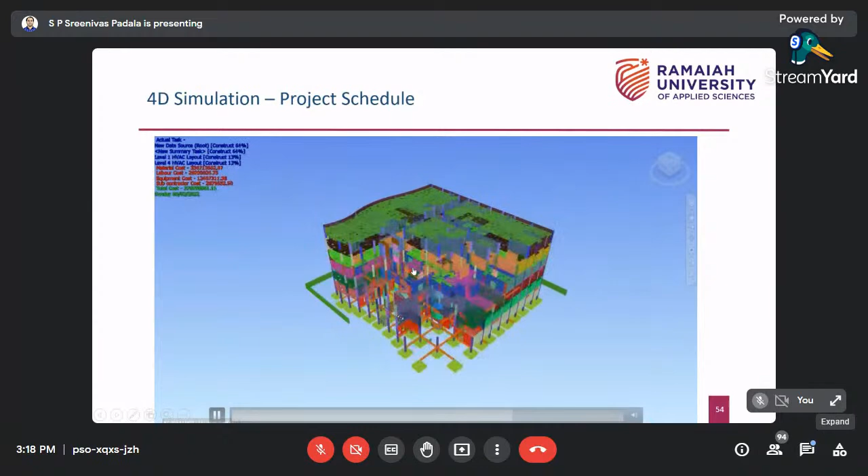So you can turn the model anywhere, stop the model, go inside the model, and do a walkthrough also. The best part is the walkthrough can be done, where it takes you inside the model so you can check everything visually. So the entire simulation is done - what you're seeing is from outside, the structural building. You're not seeing the mechanical, electrical, and plumbing services and how they will be installed. That can be seen once you go inside. So for that purpose, what I've done is hide the structural elements.

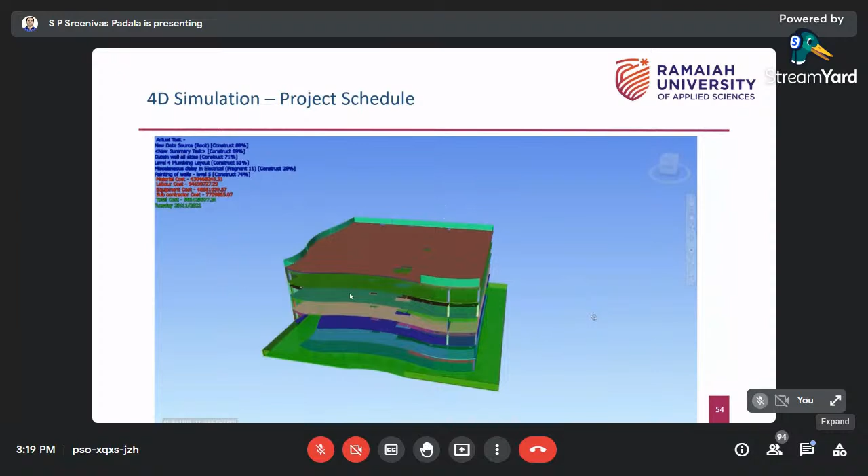And I will play again. So what I've done is hide the structural elements, so what you're seeing now in this video is only the electrical, mechanical, and plumbing details. Again, this timeline is done very short - basically the entire simulation is for more than 600 days. So if I play in real time, it would take 600 days. That can't be done, right? So I'm just doing it fast - the interval I made very small so that you can see.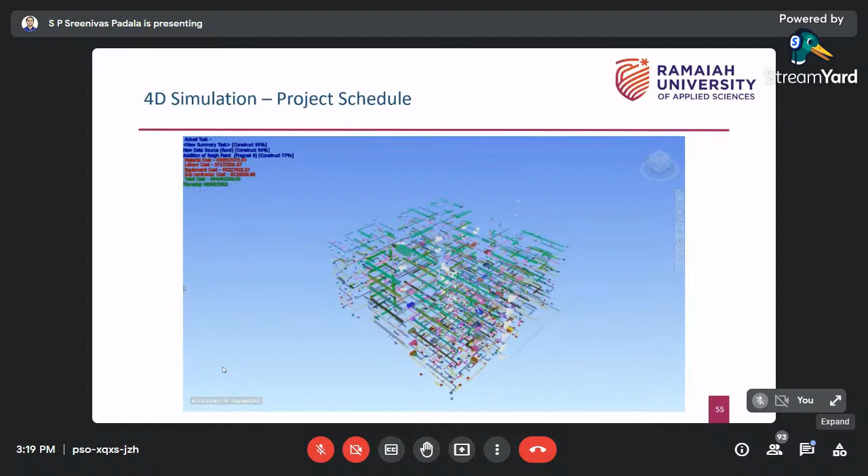In the same project, you will see a lot of details happening in simulation. This entire project is executed, so you can stop at any time, go inside, and change how it is done or installed. You can check on the left hand side the time and money spent, and if it's costing more, you can change the materials to minimize the cost. Then simulate and check again. So many things can be done basically.

These are the softwares basically used by students. They used Excel first because everything starts from Excel and everything ends in Excel. So when I say time and cost, it's all data, right? Not only time and cost, but quantities of materials, design details, load information, any other information - everything is stored in Excel.

You required Excel in the beginning, you required Excel in the end. But you see the softwares I've written here. For these projects, they have used Autodesk Revit. There are many other companies, but if you want to use Autodesk, it is free. Other company softwares are not free.

So we have Autodesk Revit, which helps us build 3D models. Then you have Autodesk Navisworks, which helps us do all the 4D and 5D, clash detection, scheduling, simulation, quantity takeoff, costing - everything can be done in Autodesk Navisworks.

Then you have another one called Microsoft Project. Like if you're doing a course in construction management in your 8th semester elective, we will teach this software. It's 2D scheduling again - not visualized scheduling, only bar charts will come. But you can develop everything in this, import it in Navisworks, integrate with the 3D model, and develop the simulation.

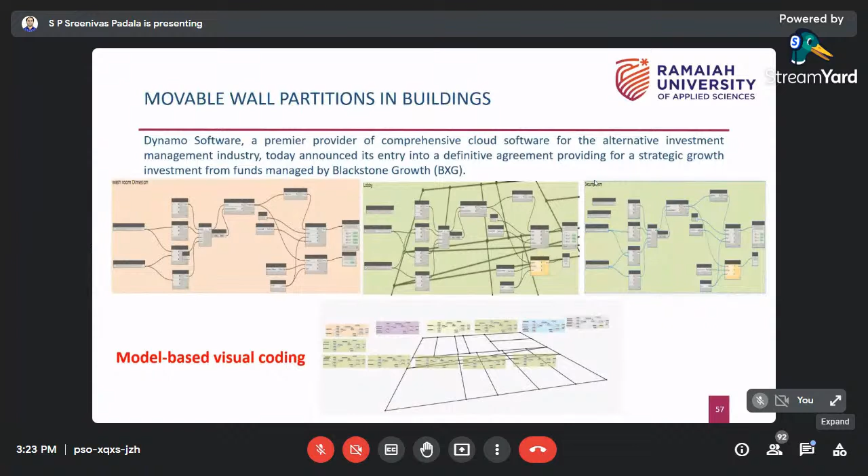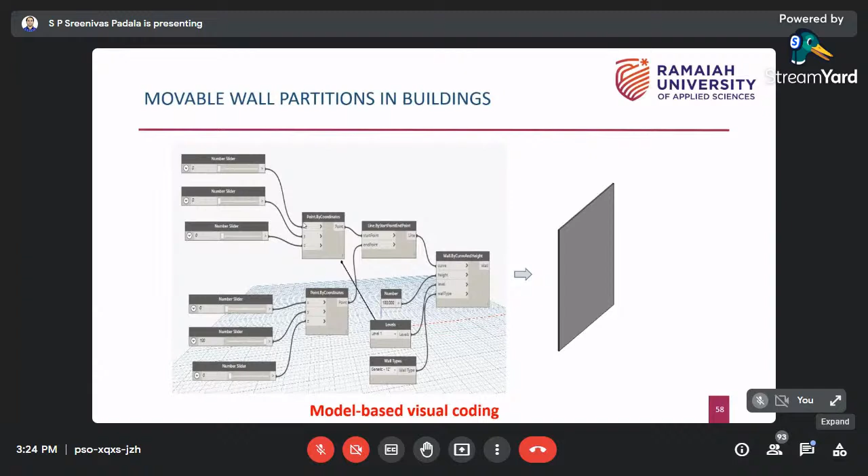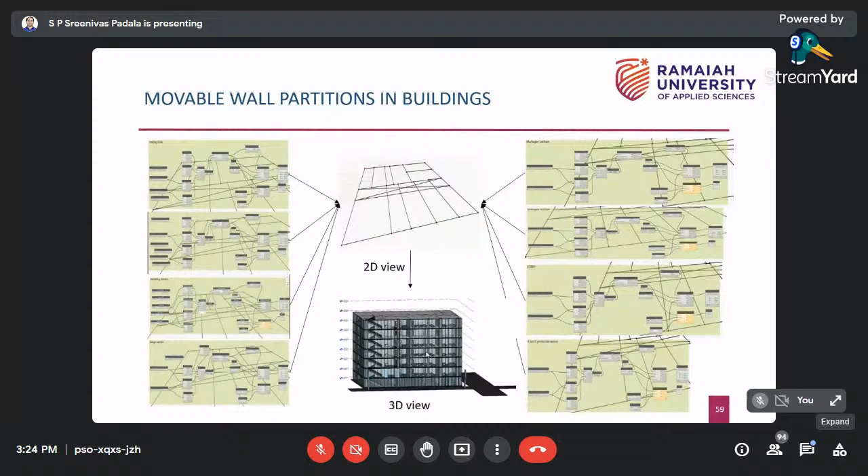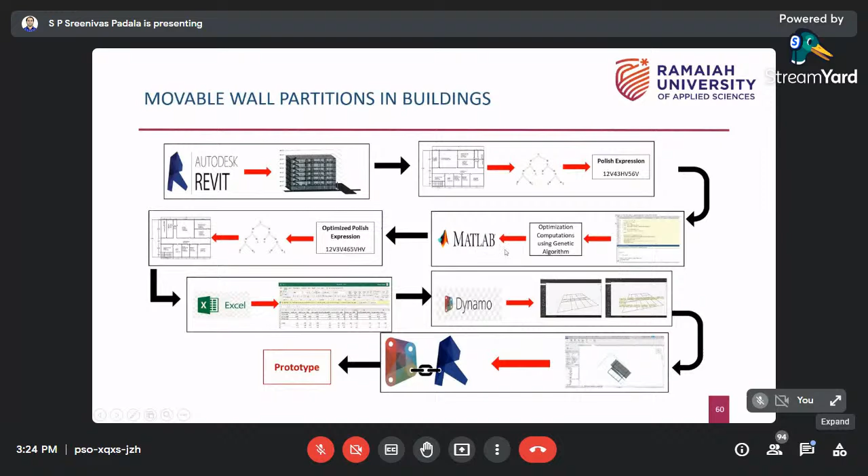It's nothing but model-based visual coding, but not like I told - it's not C++ or Python type coding. It's a different thing, which can be done at BTech level also. Same way, MATLAB and other softwares are used for any complex calculations like optimizations - I will not discuss that now.

Even our students worked on developing some prototypes. So first what they did - to develop a prototype, they again did it virtually. They developed a prototype in software, then actually fabricated it. It's one of the group projects - virtually first they finalized all the elements, then they worked on this.

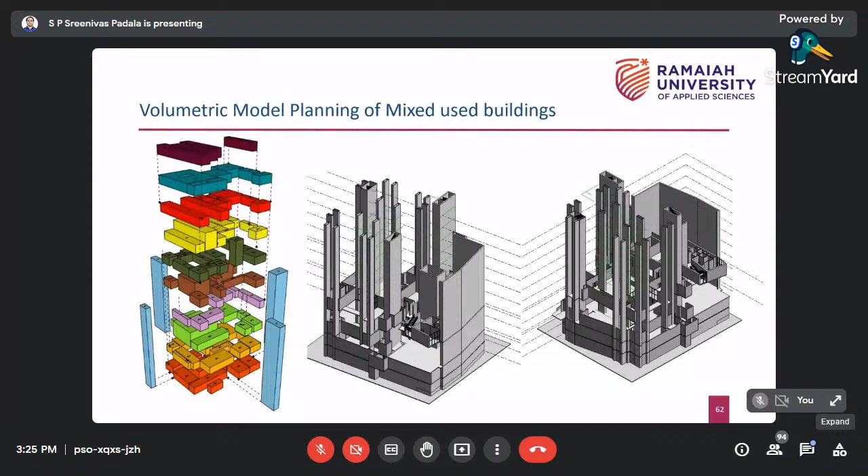You can see the level of detail exactly done in these models - with so much clarity he built this. It took a lot of time, but once this model is developed, you can do many things. You can reuse these models for many other projects.

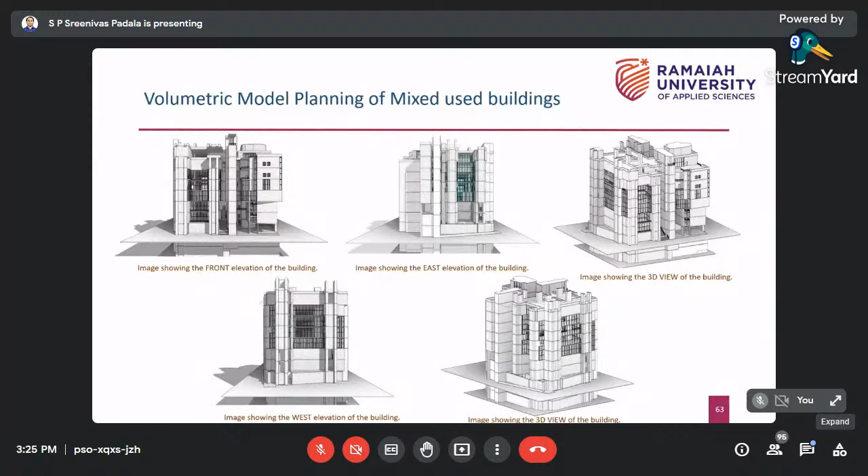So again, the same things are used - Revit software, Autodesk Revit, the Dynamo software, then Excel is also used. Then there's another software, not exactly a software, but an energy analysis plugin in the BIM - a cloud-based software where you can import all the data and do energy analysis.

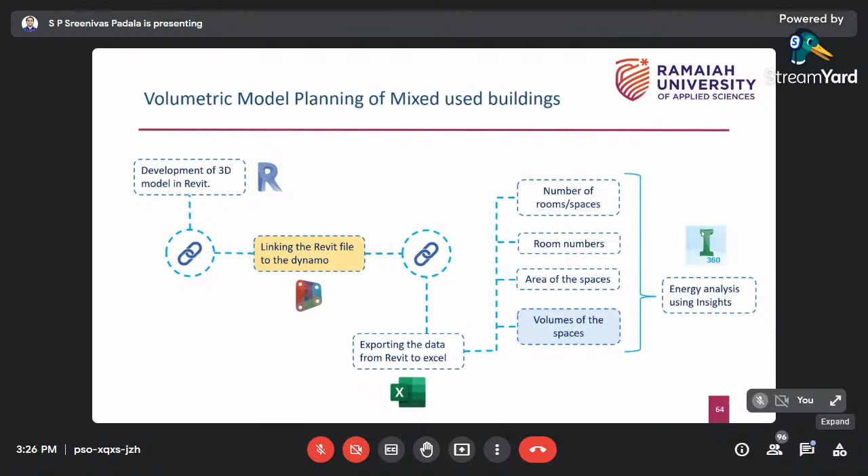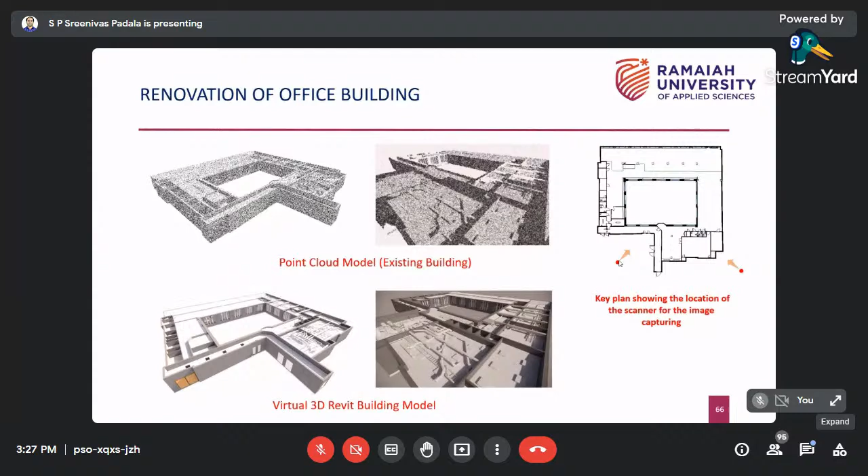There's a technology called laser technology - the company has it, we cannot buy it, it's very costly. So they used the software to build 3D models from existing buildings, with different locations again. You can see on the right-hand top corner, from different angles the pictures are taken - not DSLR pictures, but pictures with all the 3D coordinates, X, Y, Z. From different angles the pictures are taken, and from that a 3D model is developed. You can see the image on top, and how the 3D virtual model is looking at the bottom, the clarity. This is a technology used for renovating office buildings.

You can see many things are there like this. This is a very new thing - even I'm also not starting exploring it still.

What they say is that all these virtual construction models, BIM, building information models, can become a support for your data science, machine learning, AI and all. Because AI, artificial intelligence, depends on past data - they depend on previous data, so it requires a lot of data to study and to predict. So if you are implementing these building information models, then you can reuse the data to predict various things.

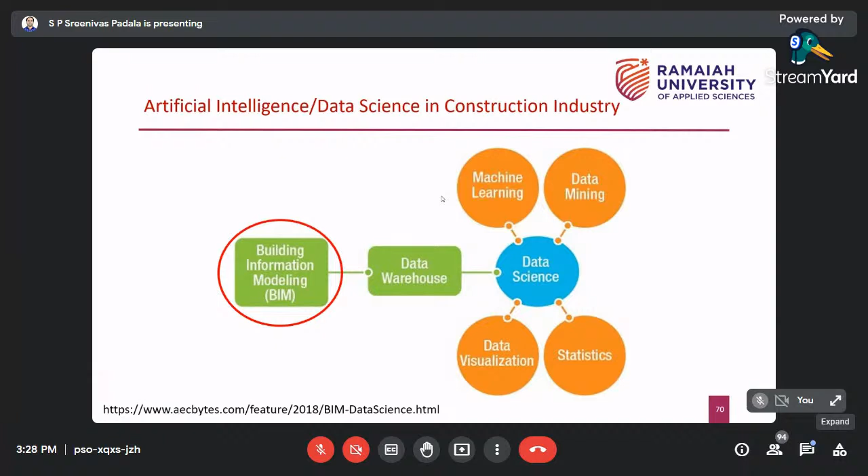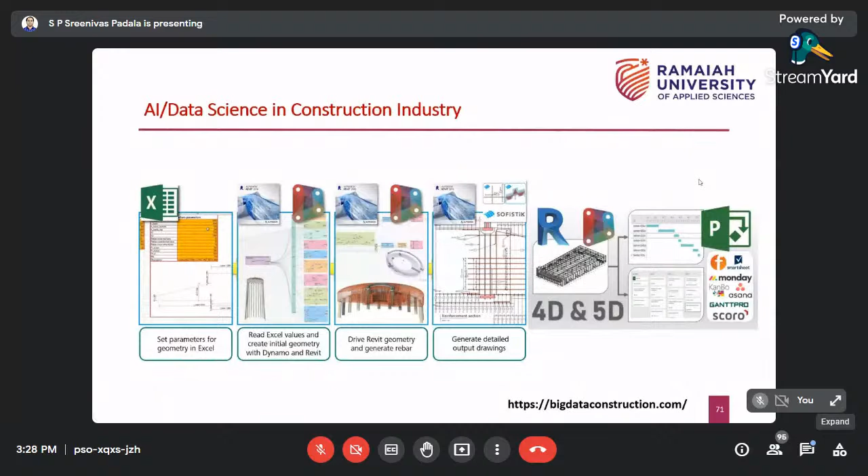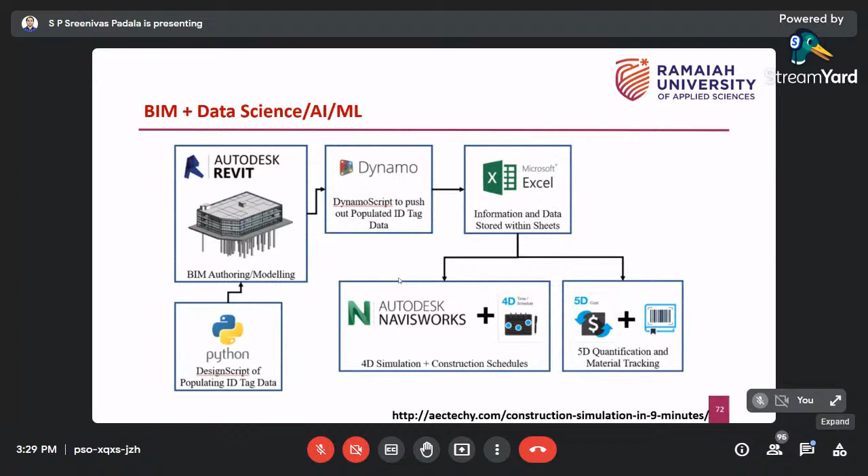This is what the industry wants. If you want to pursue a career in this area, they want you to at least learn how to estimate time and cost, schedule the project, and plan the project using these softwares. This is what I was telling you in the beginning. You can learn this on your own.

And Coursera, everyone knows. Go to the Coursera website, search for BIM, and you'll get two courses: one is BIM Fundamentals, and the other is BIM Application. They are free, you can see it's free to learn. If you want a certificate, you have to submit assignments. There is no exam, but you have to submit.

You have to prepare a 3D model. They will give some homework, you have to build all the 3D models, and send screenshots to them. Then you will get a certificate also, which you can put in your resume. You'll be certified basically.

So you can learn these two courses. There are two courses: BIM Fundamentals, which talks about 3D modeling, and BIM Application, where you learn 4D and 5D. You can learn this freely right now, you can start and learn.

There's another course I've written here, construction management, also very important. If the course is already there in your BTech elective, fine. If not, it's always good to study construction management courses also. It's only one course I've given because all the software - you cannot really become an expert just by learning the software. You have to learn the theory behind it too.

You should know what scheduling is. There's the critical path method, there are some methods there - critical path method, PERT method, estimation and costing also have some methods. You have to learn some theory also, some numeric analysis. For that, if you want to become an expert and try to acquire jobs in construction management, you should also have a basic knowledge of construction management at BTech level.